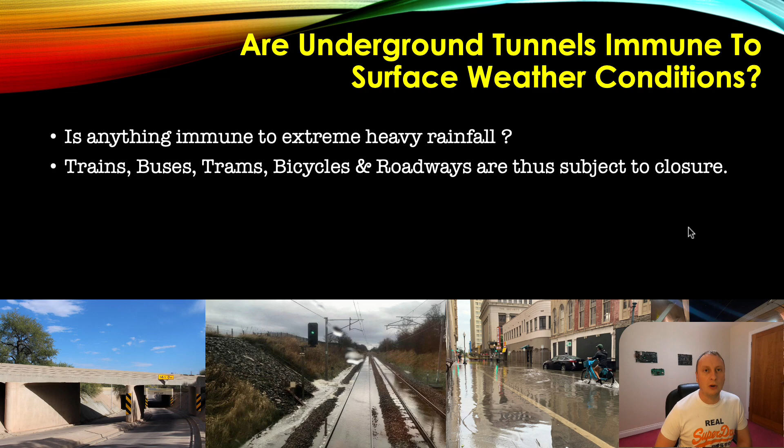So trains, buses, trams, bicycles, roadways are subject to closure in extreme rainfall. If you get 10 inches of rainfall in an hour, I guarantee everyone's going to be stuck, because that is excessive. But how often does it get that bad? Probably extremely rare. So you get these kind of weather events where you're getting 4 or 5 inches of rainfall in an hour - is that going to close the system?

So no mode of transport is immune to extreme weather events. All well-built infrastructure should be resistant to intense rainfall. When you're going through the design process, thinking about where you site your stations, your ventilation shafts, your ramps, your elevators, that kind of thing - you need to think about this topic and how you can eliminate the possibility of flooding or severely mitigate the effects of extreme rainfall.

Any system is only as strong as its weakest link. Ultimately, if you have an area of your system that might even be below sea level, depending on the country or region, that's your weakest link. If you have a ramp in that area, if you have a ventilation shaft and it gets inundated with water, no submersible pump is going to save you.

No kind of barrier is going to be able to be put up in time to resist, because ultimately those areas are open for a reason - you need to get vehicles in, you need to get air into your system, you need to get passengers out of the system. If passengers and vehicles can get in, then I guarantee water is going to get in as well.

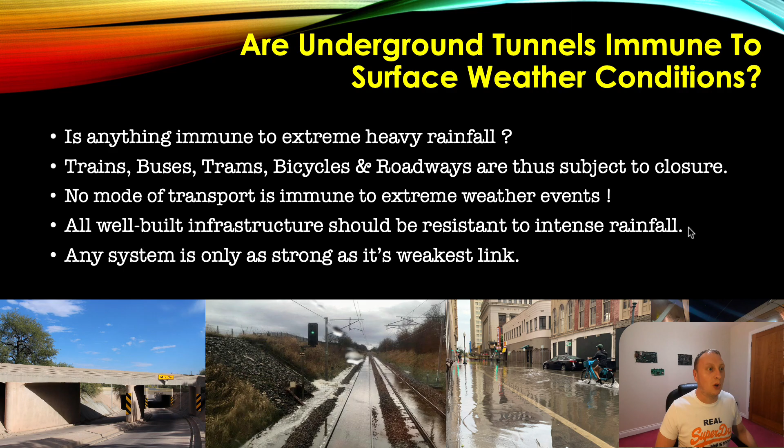So all this stems from a particular article written by someone called Brian Kahn. Now, I could go into it because he seems a little bit anti-Elon Musk, but to be fair, the content of the article does cover a topic that is relevant. So: Elon Musk is finding his ways to keep busy, blah blah blah blah, he weighs his offer to buy Twitter.

This includes espousing the virtues of tunnels as immune to surface weather conditions. I think that's a very strong statement, I'm going to be honest. I'm very much in agreement with Elon Musk 98.5% of the time, but I think on this instance you've got to be careful saying things like that, because no transport system is immune to very heavy rainfall.

This is perhaps no better example of this than subways. Just last summer, New York subway dealt with stations flooding multiple times. It's going to happen when the station is at the same level as the street outside it, and you have heavy rainfall - ultimately that water is going to find its way down the stairway into the subway.

To some extent, that's because the subways were not designed to mitigate the effects of heavy rainfall, heavy snow, heavy storms coming through those areas.

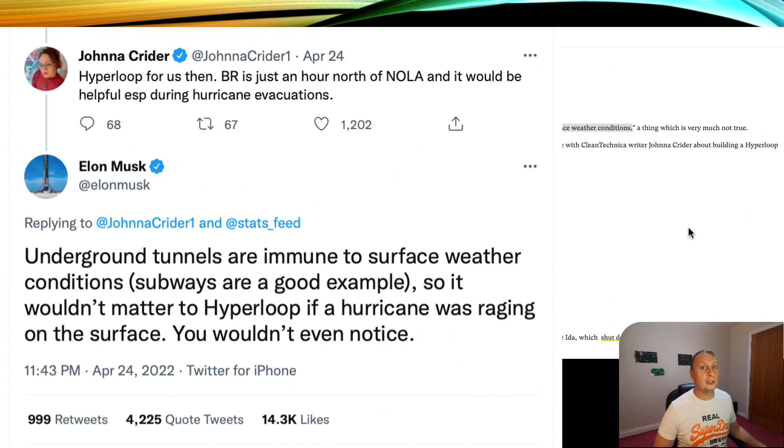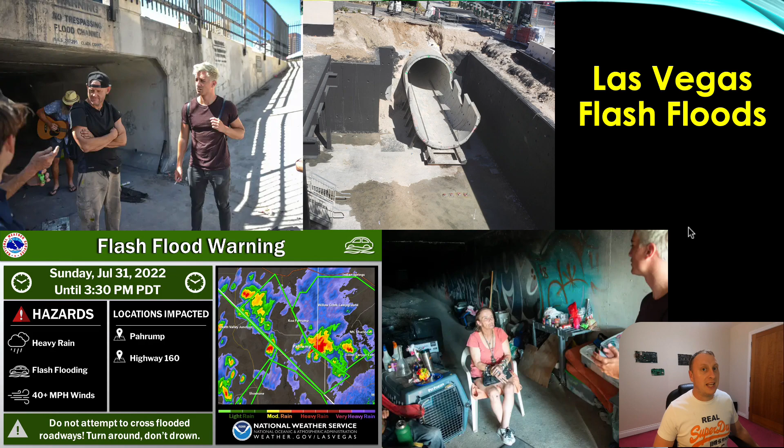Is Las Vegas any different? It essentially is in a desert, but no. I've been reading articles for years about these storm drains, these flood channels that exist all over Las Vegas, and homeless people live in there. There have been dozens of examples of homeless people asleep in these flood channels during heavy downpours, and ultimately they've gotten seriously injured or even died. It's a very sad state of affairs.

But these flood channels have been built for very good reason, in that they do get these heavy rainfall events fairly regularly, to be frank with you, and as you can see from the map down below.

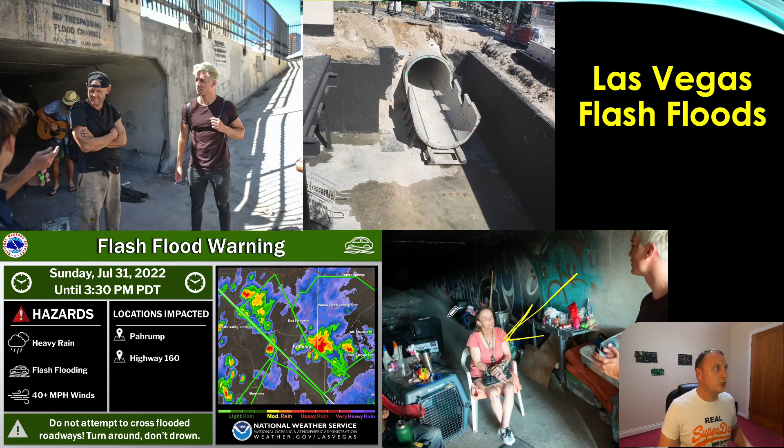There's a risk of water ingress in this area. In the long term, this area will be covered up with a concrete slab, and hopefully, if that is sealed correctly, you shouldn't get any water ingress. But unfortunately, these poor people living in these flood channels are going to be exposed to heavy rainfall, and in the event that Boring Company tunnels do get flooded, I would guess that they would pump that water into these channels or into systems or drainage areas that feed into these channels.

So it's a very, very difficult problem - basically people shouldn't be in there. You're going to have to clean out those areas. But the simple solution is that you drain the water out as quickly as possible. These channels, by the way, are quite large.

They're about 16 foot wide by about 10 foot deep, so in terms of moving water out very quickly, they're going to be very good at that. You shouldn't have lots of flood water for long periods of time blocking your tunnels, but it will be there.

There's an easy way to protect this system, in that you would have some kind of step, as it were, or ramp. You'd have to have a ramp because you'd have to have wheelchair access, where it would basically sit on some kind of concrete slab around 150 millimeters, or around 7 inches, above the ground around it. You'd have ramp access so that everyone can access it, and then in the event of some kind of flash flooding, water wouldn't make its way into the station.

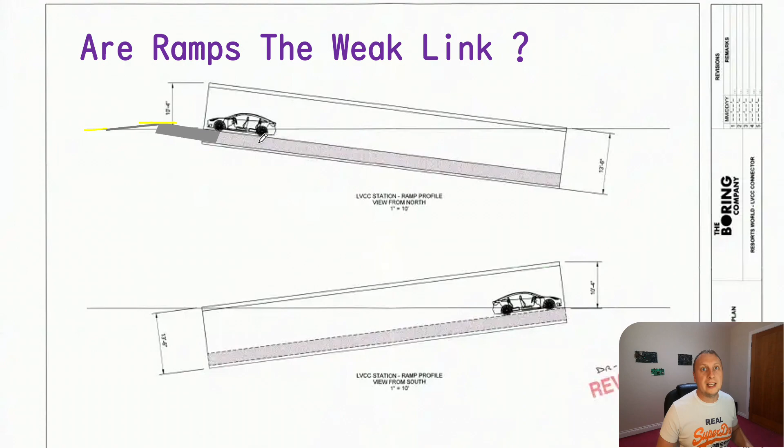Another means of doing it, as you can see here, we have these parapet walls that run alongside the ramp. You could have external walls around the station itself, which wouldn't be too difficult to do, and have a bit of a pit where the station sits, and that would prevent the vast majority of water from ingressing if it's falling on the streets.

Another obvious thing you'd need to do is have some kind of cover above the ramp. It doesn't need to cover the entire ramp, but it needs to prevent water from washing down. But really, that's the least of your problems. What you're worried about is water building up on the roads in and around this area and then coming around and going down. You don't want that, so you want some kind of protective retaining wall around the entire station.

Otherwise, you just want your road deck to finish at this kind of level, and then you'd have some kind of ramp which would go down here. It wouldn't need to be that long.

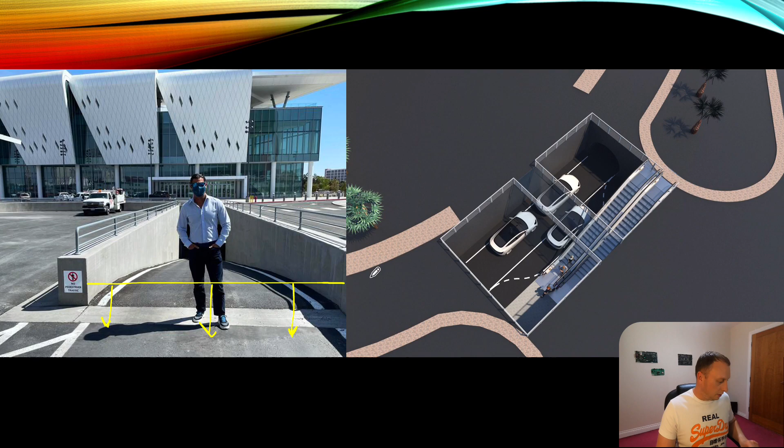It only needs to be 2 to 3 foot long, and only needs to be 7 inches higher than the land around it. We have these ventilation shafts that I've seen for the Boring Company, and it looks like this is how they're going to do it in large parts of the Las Vegas Loop. Again, this is potentially an area which could get engulfed with flood water.

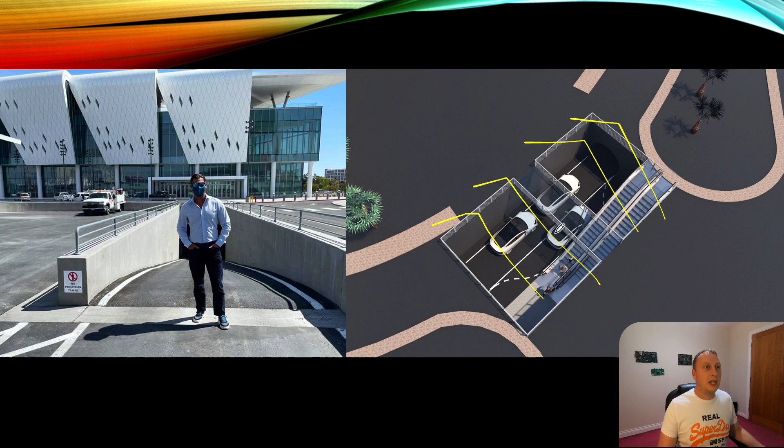Again, you want to raise the levels that these landings terminate at. This landing here should terminate above this land here. You want a slab that sits about 150 mil above the land, and then you'd have some kind of ramp here, ideally. And obviously, again, you want a cover. You want some kind of cover above this. Even if it doesn't cover the majority of it, you want it to cover 60 to 70% of this,

and then you want the water basically to fall away from this ventilation shaft here. Potentially they could have ventilation shafts going into the tunnels themselves. That is another risk as well, because if they are, I have a funny feeling they will put vent shafts in the middle of roads, because they're going to run the tunnels underneath the existing right of way. Therefore you need to have them elevated slightly, and that obviously comes with issues in that what happens if that road gets engulfed with water.

You may need some kind of system where you can close off those ventilation shafts. But if they do end up building it like this, that would be a bit easier to protect, because you're not on the roadway, and you can elevate this 150 millimeters or around 6 inches, and you're not going to have problems, and then cover it. You can have some kind of pitched roof that covers over there.

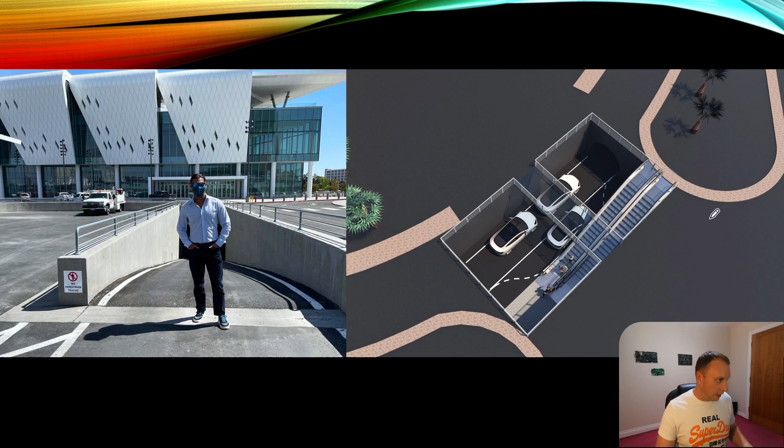Okay, so that's fairly simple. Like I say, there's no cover, it's exposed to the elements. I feel in a way that we're making a big deal out of something that's quite small, because this is only happening 2 or 3 times a year. If the system gets closed for a few hours 2 to 3 times a year, it's no real big deal.

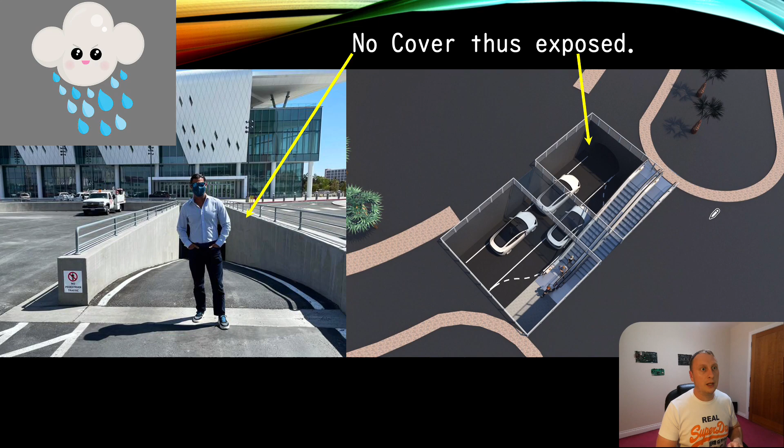But what you want to do is have this system open when all other modes of transport are out of action, and then people will migrate to the system, and it will come across as reliable in comparison to the surface roads. And that can be done with these solutions by thinking about how water can make its way into the system, and how you can raise the various entry and exit points above the level that water will probably get to. Ultimately, you could raise it 150 mil and then the water ends up 200 mil, but you've reduced the amount of water going into your system by 75% doing that, and that's going to be a lot easier to pump out. So you need to be doing these things.

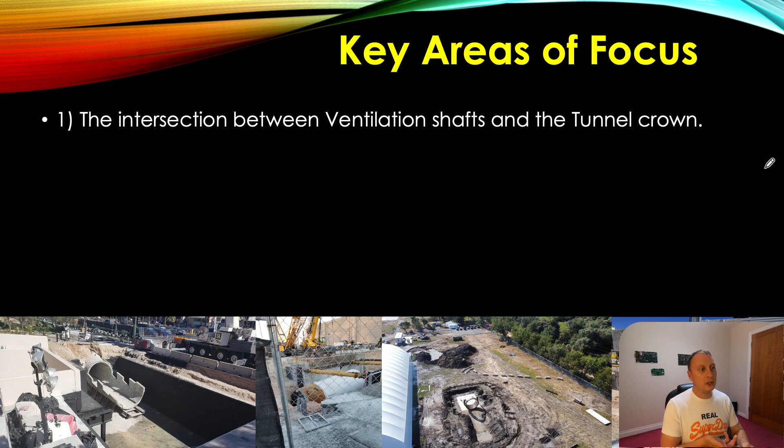So just to summarize, these are my thoughts about how I would do it if I was designing the system, or trying to assess the designs already being proposed for the Las Vegas Loop. So the intersection between the ventilation shafts and the tunnel crown, or the surface roads, you need to think, is that a weak point? Is water potentially going to come in those areas? How can we eliminate water going in? How can we reduce the impact of any water that's going to go in there? And how can we mitigate those effects?

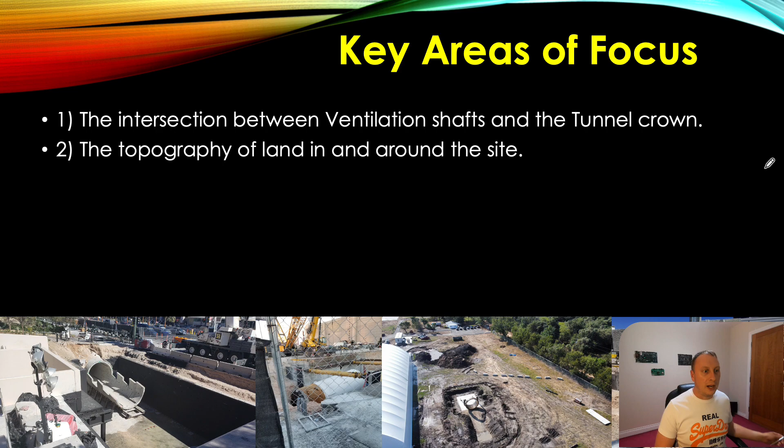Topography of land in and around the site. Ideally, you don't want to be building in areas that are lower than the land around them, because essentially that's like a giant funnel. So if you're building on land that's 80 meters above sea level and the land around it is 82 meters above sea level, for me, that's a big no-no, unless you're going to have some kind of grade adjustment there. Ideally, you want your site to be higher than the land around it.

Are storm drains located within close proximity of the site? Las Vegas has a lot of storm drains—they are pretty much everywhere if you know where to look. That's going to be useful for the Boring Company. They can have sump pumps located in the road deck, and pump that water out almost as quickly as it's coming in if you have enough sump pumps. So you want to either site it next to storm drains, or have some additional connection to those storm drains that you can utilize. That will probably eliminate the need for closing the system 95% of the time, if you can do that.

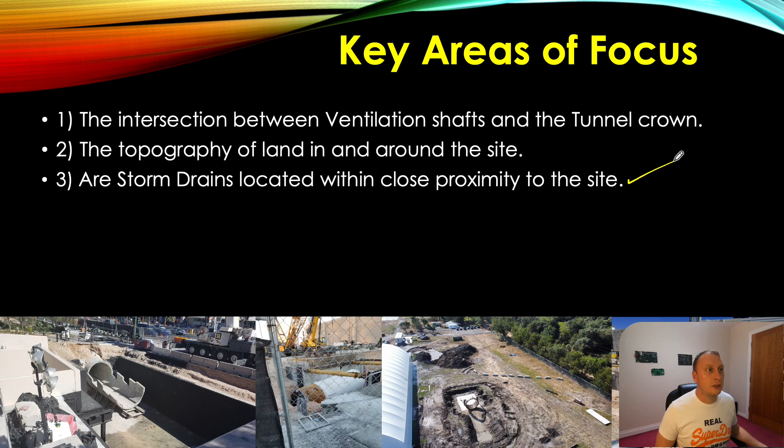That is an important one, and they should be able to integrate that. How high is the road deck compared to the vehicle parking bays? If you've got a surface station, ideally you want the parking bays situated above the actual height of the road deck, with some kind of ramp to go in and out. That's going to prevent the vast majority of water from making its way down the ramp into your tunnels.

Do open areas have sufficient cover to protect from heavy rainfall? You need to cover these areas. You don't necessarily need to cover the entire area, but you need some kind of covering—either a pitched roof, a mono pitched roof, or even a slightly flat roof with a slight gradient on it.

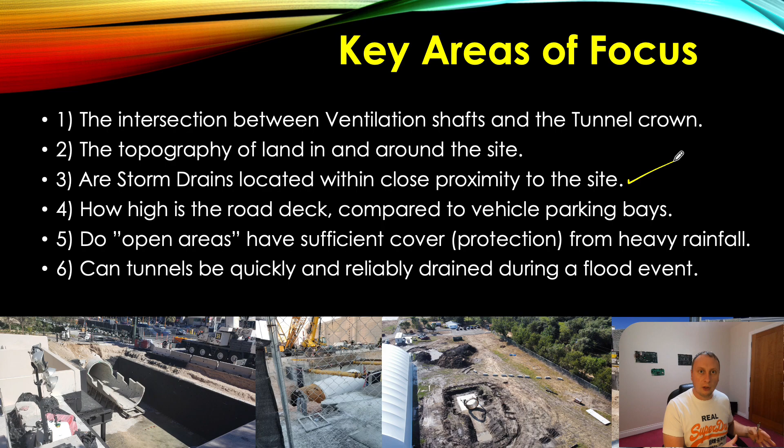Can tunnels be quickly and reliably drained during a flood event? You need to have plenty of sump pumps, backup power—potentially via Tesla Powerwalls—and those sump pumps need to be in areas you assess to be at high risk of flooding, or low points in the system. So you might have an area going under another tunnel, and that area is obviously a lot lower than the rest of the system, so you'd situate your sump pump just underneath the road deck there.

Okay, so that's kind of the summary. In terms of how I weigh up the risk of flooding for the Boring Company in Las Vegas, it's fairly low anyway—people just seem to have a lot of interest in this particular topic. I think there are a lot of measures we could introduce to severely reduce the probability of flooding, way below like 2 to 3% probability of flooding in any given year.

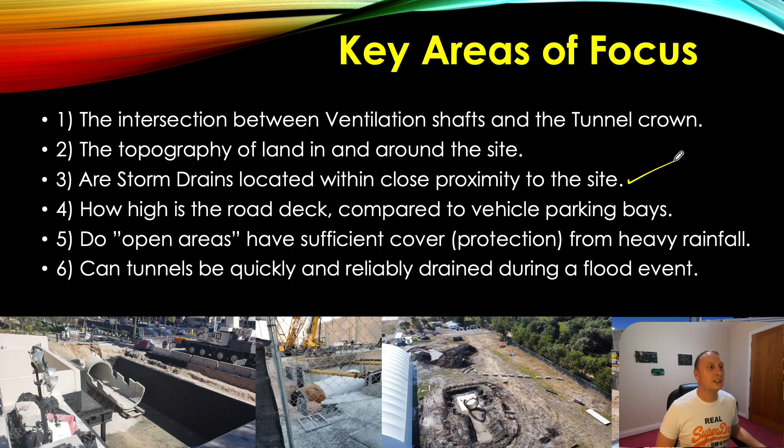But they are additional costs. Is the Boring Company going to foot those costs, or are they just going to say the risk is so low we don't need to worry about it? That's my worry—that they'll just say the risk is so low, we don't need to think about this, let's just forget about it. There's no regulations covering this, and there'll be a big flood in 2 to 3 years' time, and everyone will make a big deal about it. But hey, I'm not worried about it.

I think that they should hopefully consider what the risks are in a world where we're having more extreme weather events.